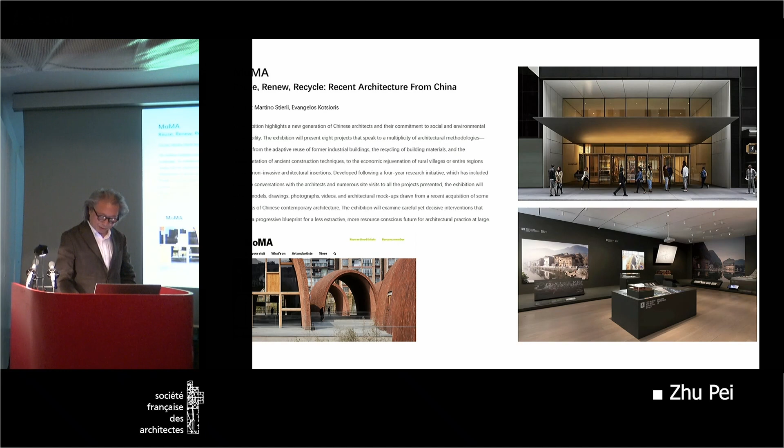This exhibition discovers a new generation of Chinese architects trying very hard to find a new way to approach contemporary architecture, with the cultural and material tradition of China. Their designs are not only contemporary, but also strongly and deeply rooted in the tradition of Chinese cultural background. But why is traditional Chinese cultural background so meaningful for Chinese contemporary architecture?

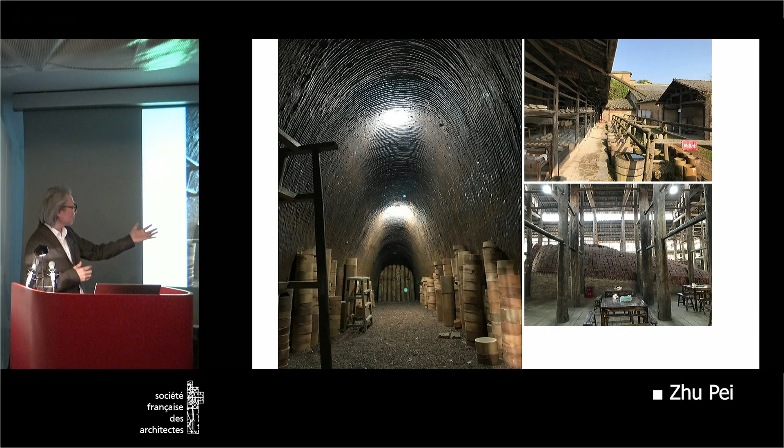Even the school—small kids from elementary school—came here to take the heat, the advantage of the warmth. Even the warm bricks, they put in the school bag. So this kiln place became their social meeting and communication space.

This became the soul of the city, and they still keep this tradition in some part.

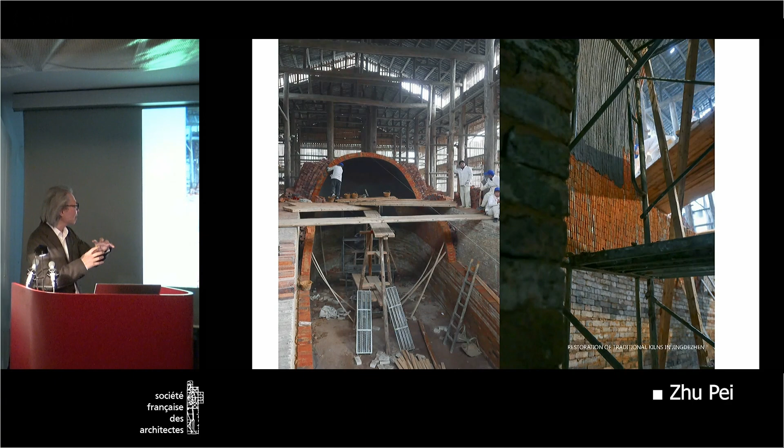When I worked on this design, I discovered how craftsmen rebuild this brick kiln through construction. The basement is never demolished, but above it they have to demolish once a year. They have to keep the thermal character going after burning many times—they lose the thermal character, so you can see the bottom right.

This is the video I took, actually now collected by MoMA. I selected part of how they built it. You can see they use their fingers to create such a complicated double-curving shell.

This vault is not like an arch. You can see their fingers, inch by inch, changing the shape. So they convert a complicated double-curving form into single curvature.

I think this is similar to today's work on complicated form architecture—we have to cut through, transforming complexity into simple curves. This is a lot of inspiration.

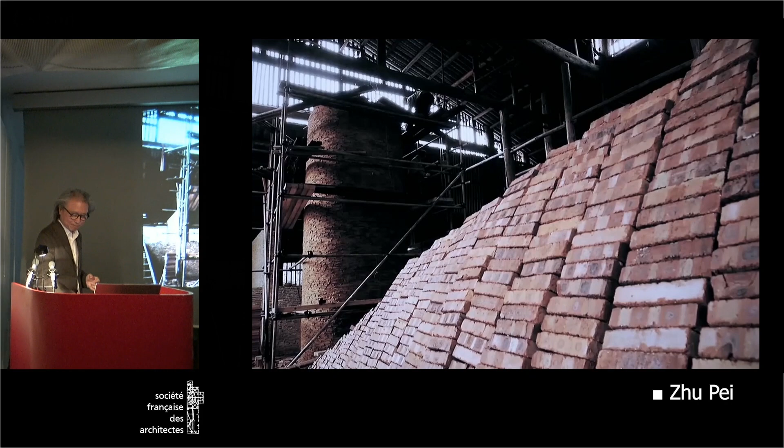Now, in local tradition, this is how it works. The brick kiln has to be demolished very frequently, and those glazed small bricks, piece by piece, get mixed with new brick.

They build their housing. The whole city is built on this tradition. This is our side, and beyond is the...

imperial kiln factory, from the Ming and Qing dynasty. This place used to be the fire station, then it relocated outside. We can see such complicated urban texture and fabric. You can see this Ming Qing dynasty housing, the social housing and so on. Beyond, you're going to see the big river.

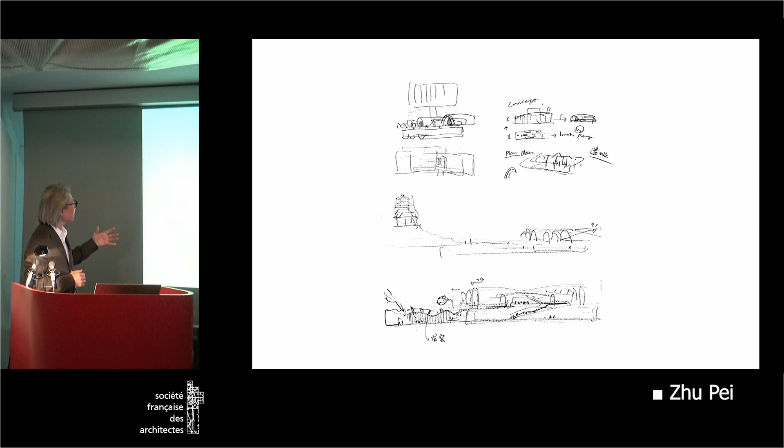So if I try to simplify my idea, one is that I try to transform their kiln, the brick kiln, into a contemporary space to work with this museum. Since this museum is going to be built to specifically house the porcelain produced from the imperial kiln, this is more like an archaeology museum. So I think about where the porcelain came from—maybe from the brick kiln, like this vault, never too big, never too small. This is the reason I want to transform it.

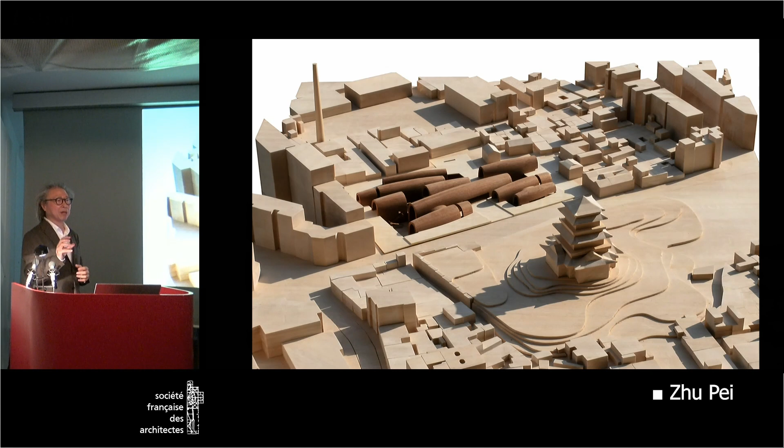I think you feel this is very old thinking, right? The root is very old, like historical continuity. But the architecture became contemporary. If you look at it, this is the conceptual one—you can see each is a different curvature, different size. It's so complicated in another way, but we discovered a simple construction approach to make this architecture more systematic.

This is our process—I don't allow my team to use 3D printing to make the model through the conceptual phase. I know the construction is by hand, right? But you cannot design this way through the digital. I feel this gap must happen. This is the reason I found out a lot of architecture falls apart or fails—because they use 3D printing for everything, but until construction, there's a disconnect.

So if you look at this, why is the form curvature so complicated? But you can see this horizontal cut—this is a handmade model. That shows the system. Even this very complicated form—we still use a very simple way, like the craftsman making the brick kiln. It's layer upon layer, millions of layers of brick. So I think this is the way.

And in general, the program—people go from the archaeology side through the bridge into the foyer. This is the major front, and then the permanent exhibition goes from inside, past the connection, and then to semi-outdoor, inside again, and then down to connect back here. This is the permanent exhibition.

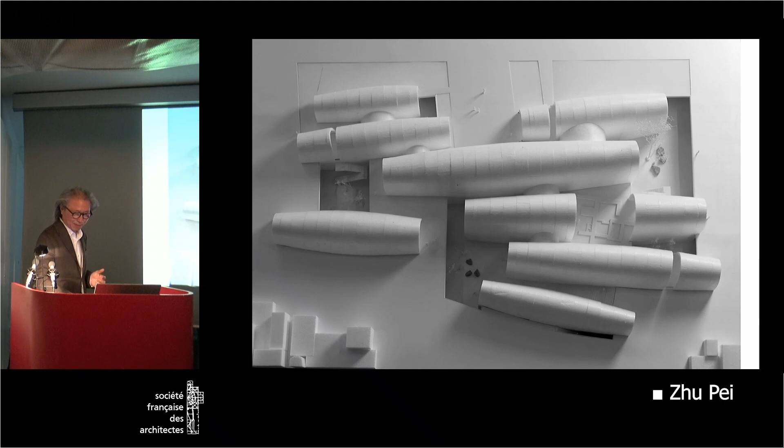So this is a very complicated program in a restricted urban site, but eventually everything worked out. After construction, we discovered the Ming Dynasty ruins, and then we readjusted the whole design to integrate this archaeology site into our design.

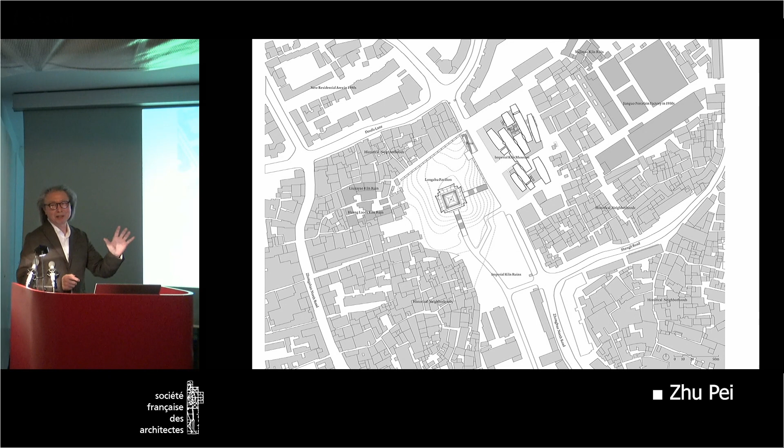We just keep doing this—even today we still use handmade models. For me, my studio's thinking always comes out either through sketches or paper models. It's not 3D, but we continue to use the computer, while at the same time also relying on the physical model.

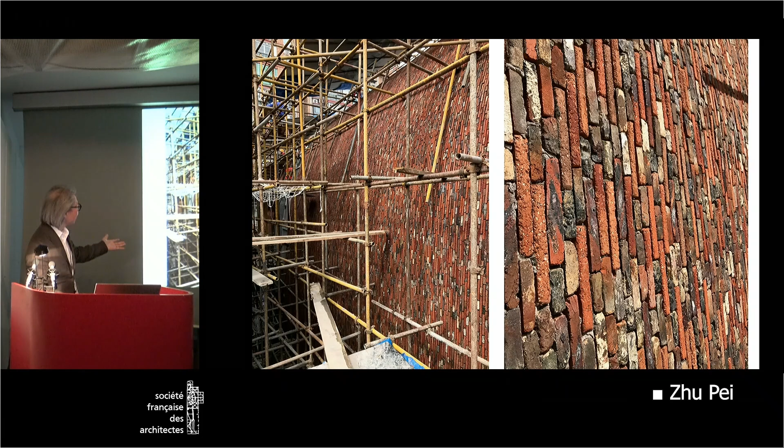You can see in general the site plan, the construction, and all the collected brick. You can see a lot of the brick is glazed, and we have a construction style—this shows how we transform or invent some interesting construction systems.

For example, this is the formwork—a wood form, so soft. This scaffolding is a changeable scaffolding, and underneath we have a track, so this can be moved, and the mold can be adjustable. The first layer is laid based on this mold, and then we put down the steel bar, pour the concrete, and finish with masonry for the brick.

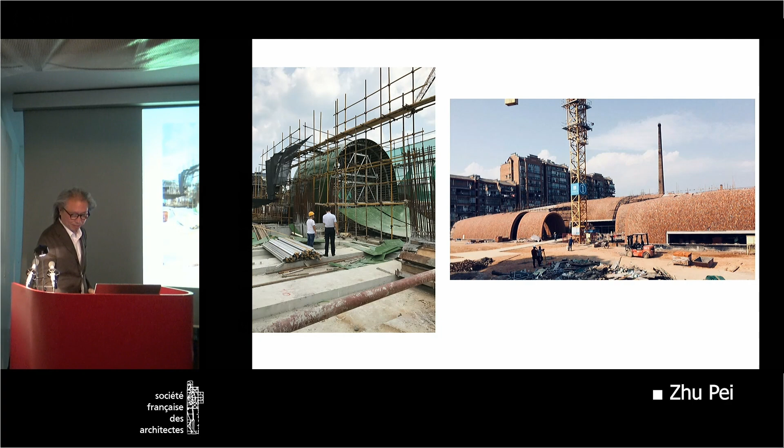Incomplete integrity, right? You can see this is zigzag. The building became fragment form rather than big chunk, the object or landmark. So I feel this building strongly represents my point. It's also talking about rootedness and how you invent new things.

So this is maybe, right, this is after build. You can see the whole building is somehow sunken, close to the earth. I feel architecture is earthwork and roof work. You can see this is surrounding the hill, and the whole building just peacefully, some water, small reflecting water, to organize how people approach, to get close to this architecture, also beyond the factory.

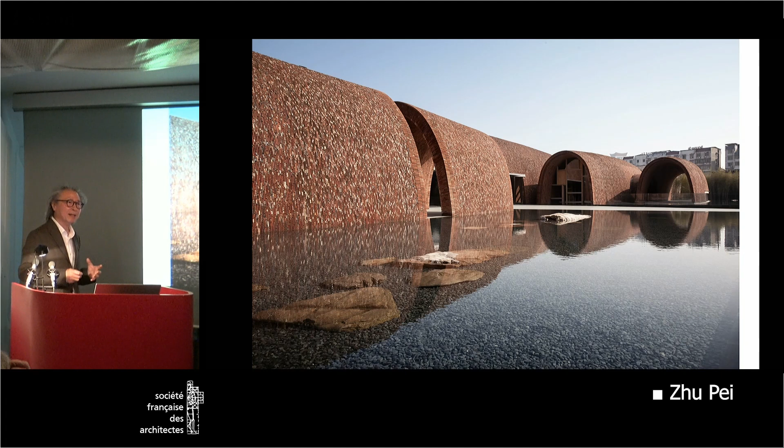And this building also showing the roughness. Sometimes you can see the roughness and peaceful water with stone, kind of a tension, poetic way. I think architecture has to create tension. One way is very old, another way maybe is a surprise or that thing.

So this also, once people close up, you see the mixed masonry wall. You can see the old brick, new brick. This is a lecture hall. You can see here, and this is a tea house.

This is the entrance. People pass this little bridge, reflecting the local culture. They like water, since they consider water is fortune, for example. This is like...

Along the public edge, not only do you have this water, but also it's semi-public. All the programs can be independent once the museum is enclosed, like this lecture hall. They have a separate entrance. This tea house, all have.

So this is also showing the tectonic or material proposition. You can see this wall structure, right? Once we cut this horizontal window, you have to use a big beam to support. So they start showing this idea.

This is a tea house part. We have a huge cantilever, the concrete beam to also. Once you walk in, you're going to feel the space going to somehow attach your body. If you make this museum too big, you'll never have this sense of feeling.

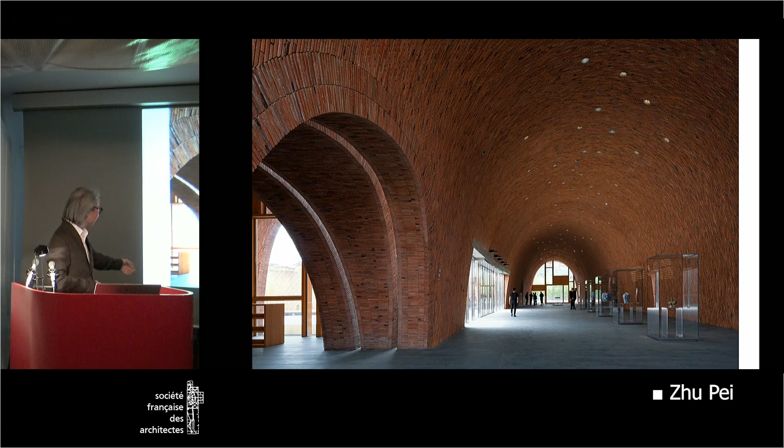You can think about it, even without this glass case, everybody would feel this must be porcelain space, right? But for this design, I made the whole thing. Not only architecture, but furniture here - you saw the glass case - all designed by our team. You can see very transparent, minimum glass case, making a contrast with the brick.

Right, this is once you go inside, you go to another space, which is from semi-outdoor, indoor, semi-outdoor, go to the indoor again. And also always changing in terms of the curvature, the scale of the gallery space.

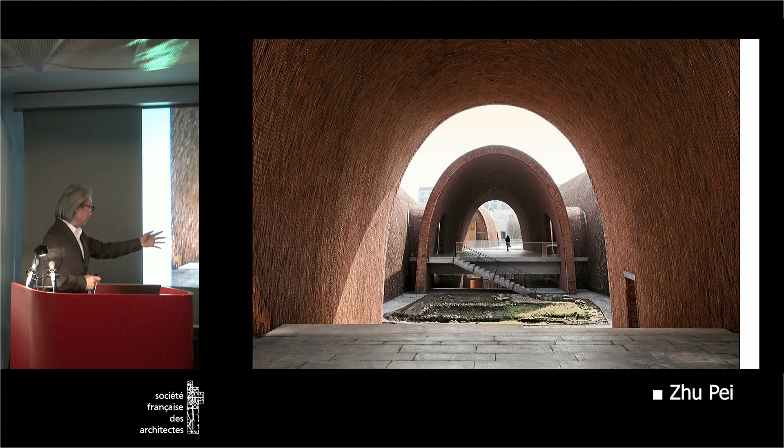This is like I mentioned, archaeology, the ruin site, and then we integrate. This way, it is the amphitheater.

You can imagine people sitting there to see through the building. Not only do you feel the natural wind touch your body, but at the same moment, you see the people in and out. You see the people go up and down to get close to the ruin. And then this is showing somehow people wandering inside the museum.

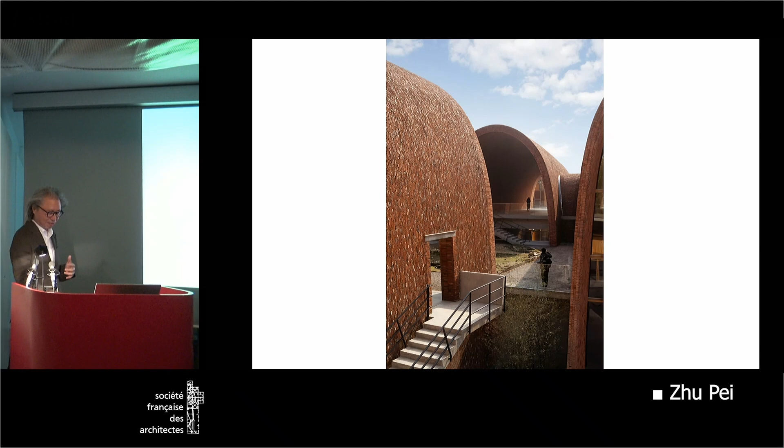It's more like music. I consider the architecture to be more like music. You have to have a certain order, just their foundation, and then you make something different. You can see this difference in height, difference in scale, different program, different light. All things are different, but they're based on the same brick wall.

People go down this stair. Once you go down, you're going to see the light. Just bring the people down in order to make this whole building as low as possible.

It's lowered as much as possible. And then courtyard, people also can see the working place, how people restore the porcelain and fakes, but you see the bamboo, you hear the raining sound, it's beautiful. You can smoke under the cantilever. So this is what I mentioned, the wall.

This door, if you go there, you're going to connect to the temporary circulation, but sometimes they separate, sometimes they connect together. And then this is how we can make arrangement about the glass case.

People criticized this. I called the expert and they criticized me, saying we never saw a museum like that, that it's going to be no good for the exhibition. But I told them, most museums place the glass case against the wall, but then we can only see maybe one side. Porcelain needs 360 degrees of visibility - they shouldn't only see one side, they need to turn it around, they need to see the bottom.

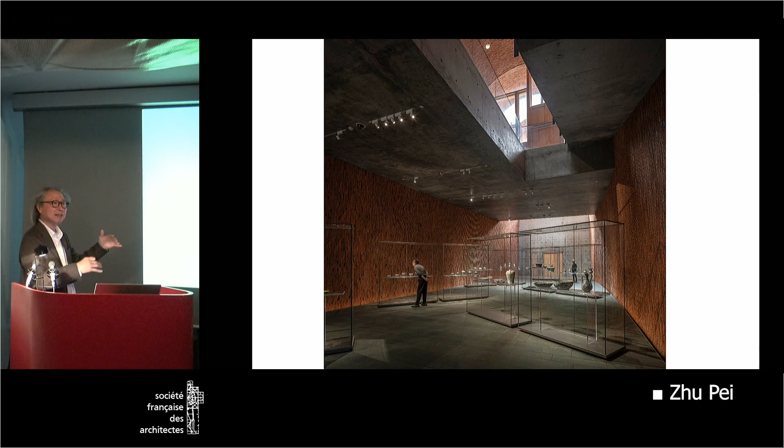They can tell where the porcelain comes from and when. So I feel this kind of fishbone structure organizes people's circulation. I feel this lower part of the space is more like a fish belly - the fishbone works with the fish belly. Once again, the whole thing has to work together, they have to have that relationship.

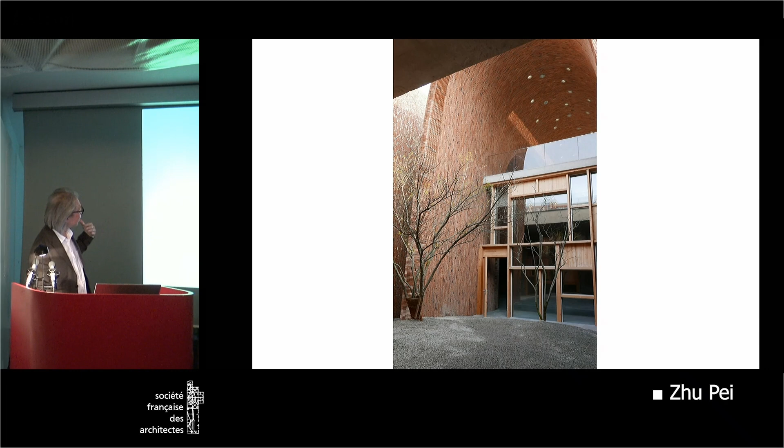This is a courtyard - you see the tea house, people sitting there, you see the landscape. Actually we're standing under the roof. Behind is a multifunction hall. This is the one courtyard, and then this is the point.

When we finish the permanent exhibition, you end up at one stair. The whole museum never shows the stair as a whole thing, just shows one piece. People are going to wonder what is beyond, and then they're going to try to discover it. I feel architecture has to make people interested, to attract them from one place into another. I think wandering, or moving, is important for architecture.

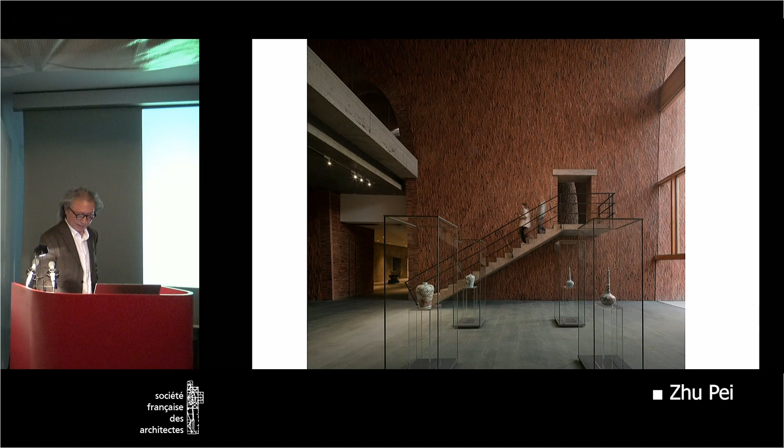And then you see the little door, right? And then you discover, oh, another stair - people find their way down from here and turn the other way. So it's half hidden between two brick walls. Look at this brick - people always want to touch things. This masonry wall uses very old brick, and it's really hard to tell - people wonder when this brick is from, maybe Ming or Qing Dynasty, even earlier.

This takes you back to the foyer again, until you see the front little lobby space for the lecture hall. Once you open the door, you see the whole brick wall. This is more like their working condition, topped with an observation hall. When they were firing the kiln, they had to rely on a little window through the wood to see the color of the fire in order to tell how much degree it was.

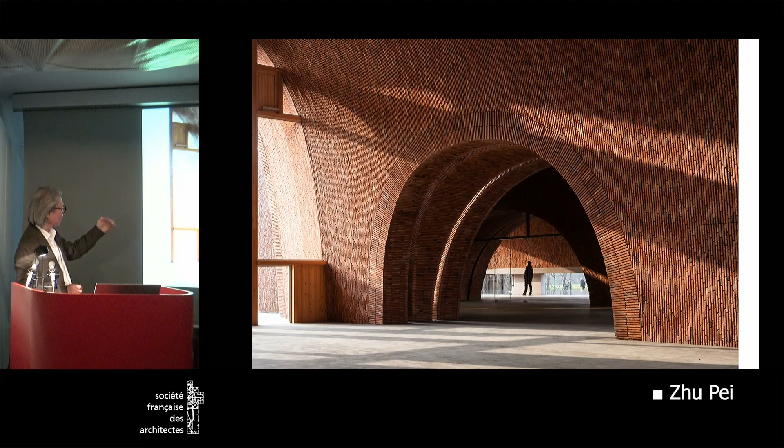Also this lecture hall is not a black box - we also have a horizontal cut, like a water level, the surface level half down below half. So once you feel bored, if the lecture is boring, sitting here you can see through, vertically and horizontally, to enjoy the nature. So you feel the space goes from one into another, connecting each other.

Once you walk to the tea house, your view is blocked by this brick wall. You have to sit down. Once you sit down, you see through this horizontal cut, beyond to the archaeology side. I think the archaeology side is always talking about what's underneath, right? Once you sit down and drink the tea, thinking about the earth underneath, I feel that's going to bring everything together in nature - environment, program, people's activity, light - everything.

They're working together. This is also showing a lot of operation windows - they can bring light in. Some open, so the natural light can quickly and naturally concentrate.

I'll take a few minutes break - enjoy. Sometimes architecture, I feel, is hard even when I show the slides. Maybe now, I don't know, maybe video is better, a lot of the time.

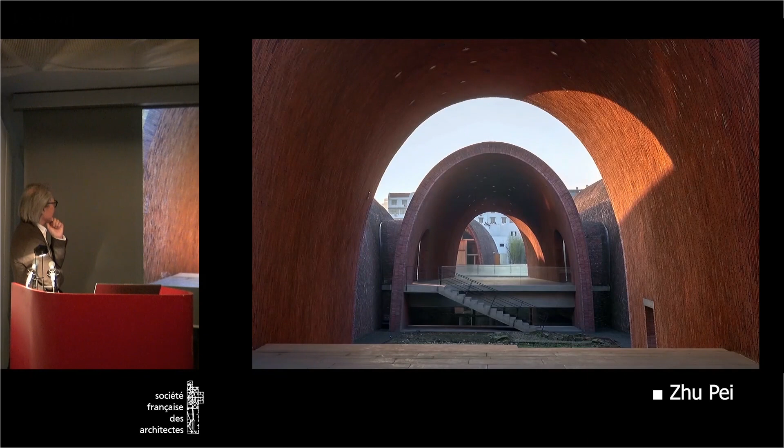Architecture is not only an art piece, but your work has to really make people enjoy it. So after this museum was built, wow, a lot of people came. This whole city used to be dead.

So I think sometimes architecture has the power to really make people enjoy it. I think this is the porcelain museum. I'm going to quickly talk about another one currently under construction: the Majiayao Ruin Museum and Observatory in Gansu province.

Jingdezhen is kind of tropical, but this is a very cold, Loess Plateau area in the northwest part of China. This is the ruin site, discovered by the Swedish archaeologist Johan Andersson in 1924.

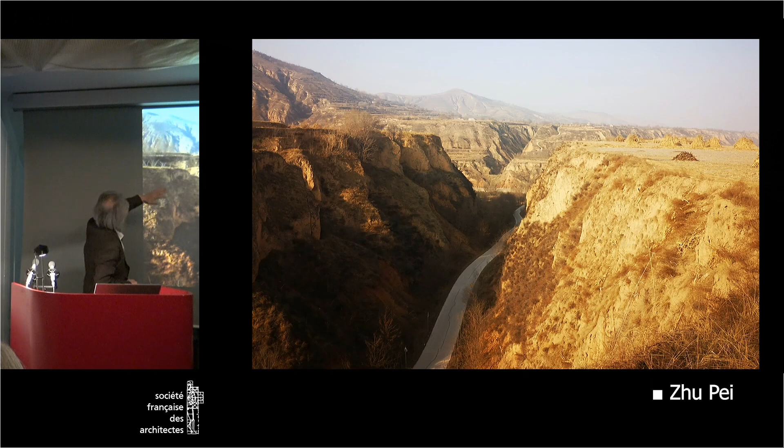This is local - the mountain is beyond, but it's more like a flat Loess Plateau, with yellow clay. A lot of the early houses were like caves - people carved things out because the clay is so easy to work with, soft, not like Jingdezhen which is rock and water. Here there's less water, but beyond there's a big river.

This is my earlier sketch, the correspondent for two projects we're going to do. This is cutting the section - this is a canyon beyond the mountain, and this is what we call the plateau, the horizontal.

This is the observatory, and then this museum, this ruin. You can see the observatory, museum, ruin, and then one canyon bringing the water, going beyond.

They have a big river called the Tao River. You can see locally there's white land, and the plateau river runs just perpendicular, going this way. It's quite interesting - when Johan stood on this plateau front side, this is how they realized people chose the location for the settlement.

I think it's quite intelligent - this is facing south, against the plateau. But they're not too low because of flooding, and not too high, far away from the water.

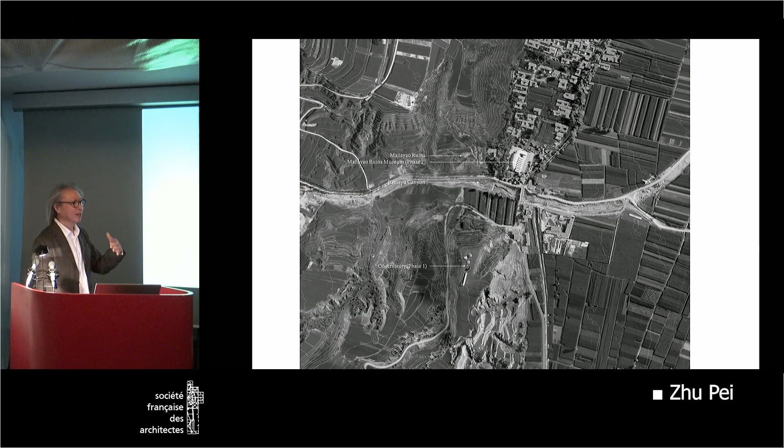I think this is what I'm talking about - siting posture is so important for sustainable thinking in architecture. Not just building everything, everywhere in the same posture.

So this is our drawing, cutting through. This is our model - the museum, and the observatory on top. For the observatory, I did a very simple, permanent horizontal cut, hiding inside this plateau.

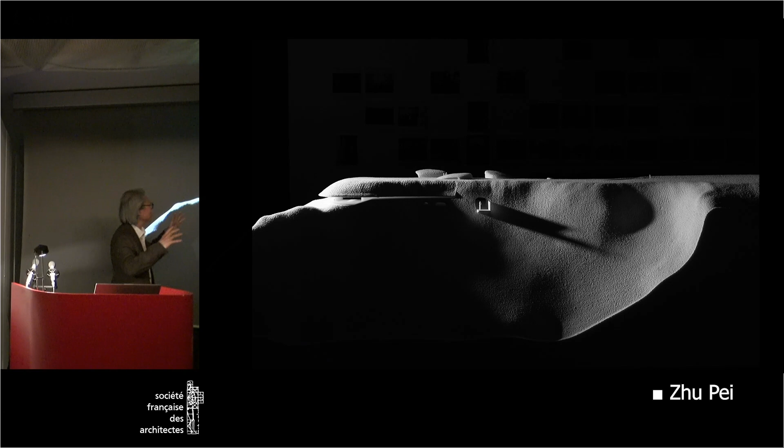Just one cut, and maybe a little hut to represent this civilization, but most of the things are hidden in this plot. Construction is even more challenging and quite critical.

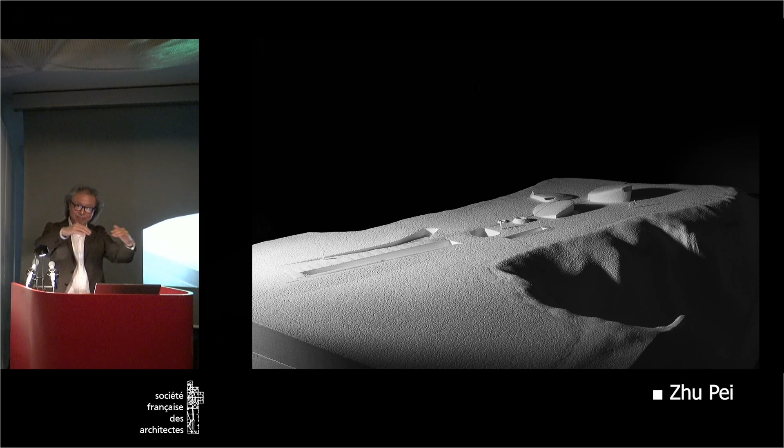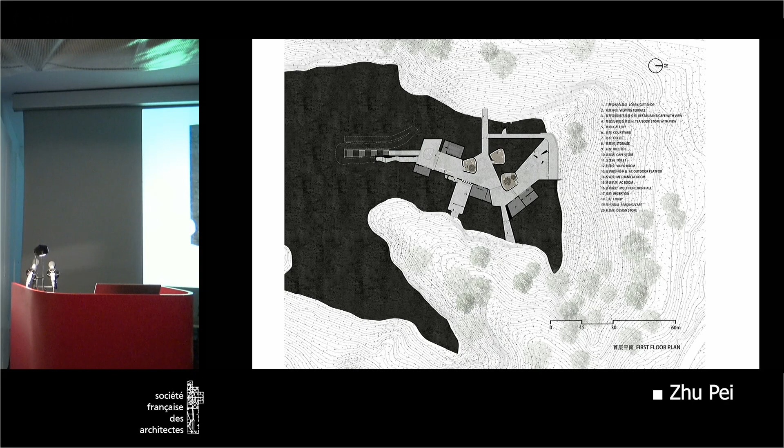In order to protect this weak soil boundary, we designed the construction to only dig a hole in the center and then carve out a tunnel to the boundary in order to keep the landscape. You can see people come here and view three sides - the landscape beyond, the water, and the ruin site.

So this is a very challenging construction approach. You can see the scale of the model - we rely on the model. So we keep doing big things.

But this is a museum. I'm thinking about a cave and a nest. You can see this is the big cave, a big shell, blocking the northwest wind locally.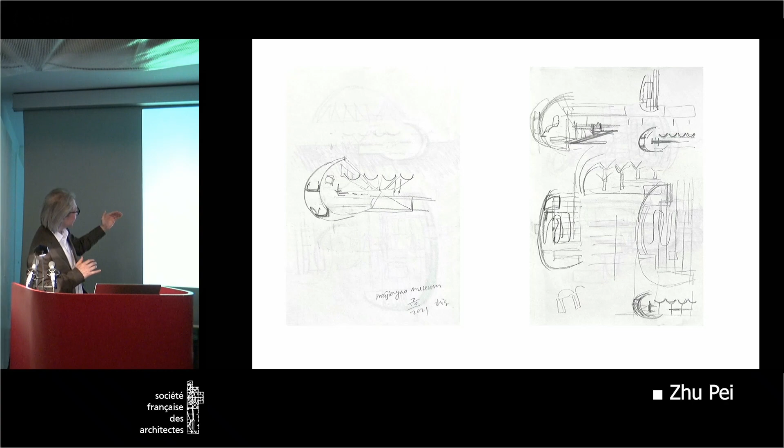There's so much wind, but it's like a piece of pottery. You can see this is our model - it's more like a translucent slide you can go inside. It's like a cave, like a huge piece of pottery.

If I compare porcelain and pottery - pottery must come through nature, not artificial. Porcelain has to be artificial, you have to make heat at 1,300 degrees. But pottery, I'm thinking about the yellow clay after a thunderstorm, maybe fire, and the second day people feel the soil has become hard, frozen. I believe this is where pottery comes from.

So when I think about this way, I have to really make this building somehow sunken into the earth. Actually, the earth is this high.

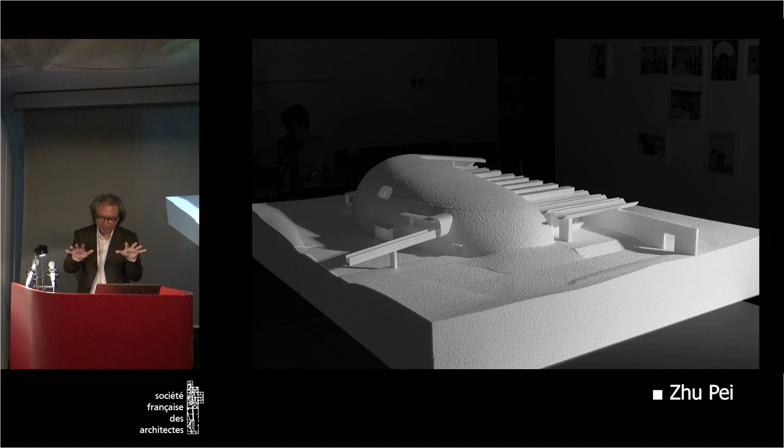And then beyond, this bridge is going to bring people into the ruin. But this whole building just pushes into the earth.

So you can see the poster, the structure and the form. You can see the cave and the nest. You also feel many things work with the people.

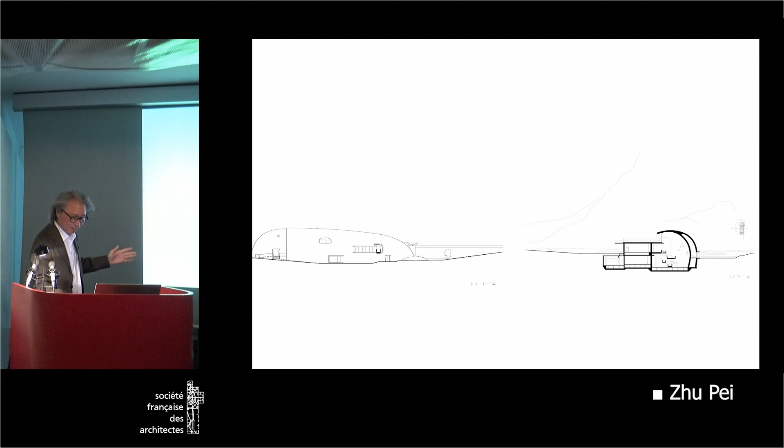And the whole building just relies on the one ramp. The ramp walks through, from this way, from here, goes all the way concentrated. You can see this go inside. No stairs, definitely we do have some for emergency elevator, for the handicap, but in general the public just walks on the ramp.

And you also feel the ceiling is not like most museums, very tall. Actually, pottery is even smaller than porcelain. So you don't need the standard idea that if we're talking about a museum, it must have a very tall ceiling. No, actually this is not that.

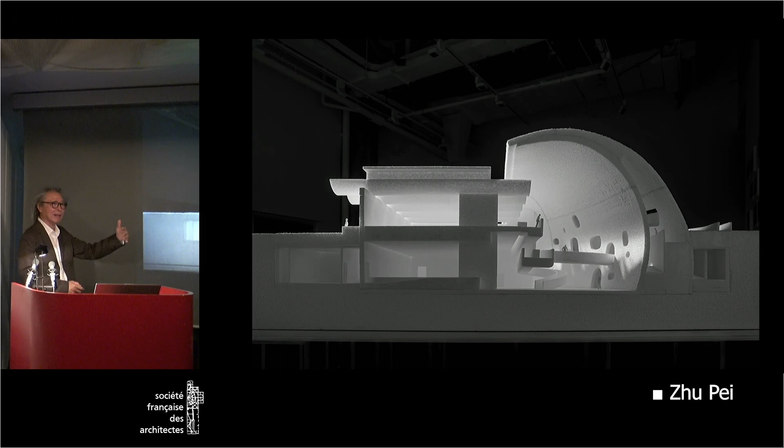And this section shows the idea for this design. The cave, also this cave, is double shell to create a kind of space. This is local - if you go to the northwest part of China, you see a lot of places like Dunhuang, right? You see a lot of caves under here. So people are going to concentrate, and you can see the whole thing brings people to the ruin side.

So for construction, you can see we never used digital methods, right? Even for this big scale architecture. I never heard of it before, and at this moment - but if you think about it, if we have very strong technology and use technology to build architecture, there would be no mistakes.

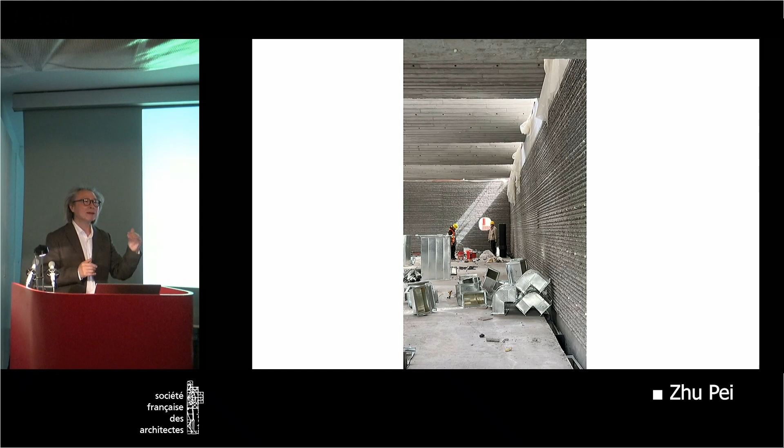Why is pottery so important, right? Because they're not made by machine. They have mistakes. They're pieces of art. They have surprises. But if we're making all architecture through technology, I feel this is no longer art anymore. I feel in the future, human beings' creativity and imagination will become so important for architecture. So this is the construction side.

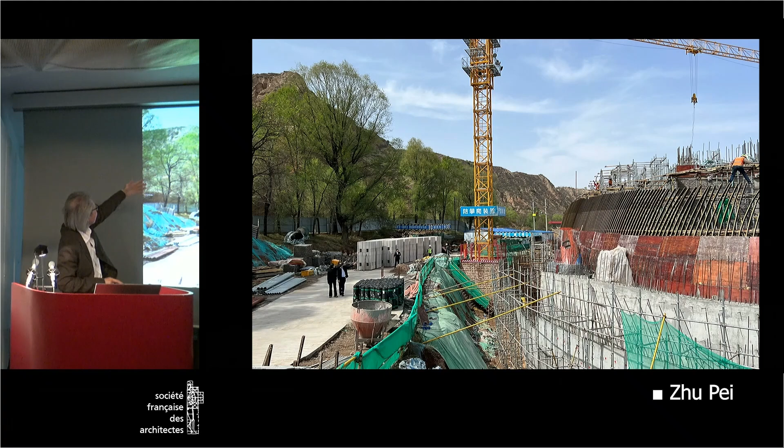We have - you can see this is not natural light. The shell goes beyond the other way. You can see the texture, roughness, and then the landscape - how we protect this landscape. You can see this is beyond the plateau.

This has many local materials, concrete things that are local. They have the Taohe river, which produces interesting sands and pebbles. We try to integrate them together. I think this is packaging again, another topographical setting. This is not a single architecture.

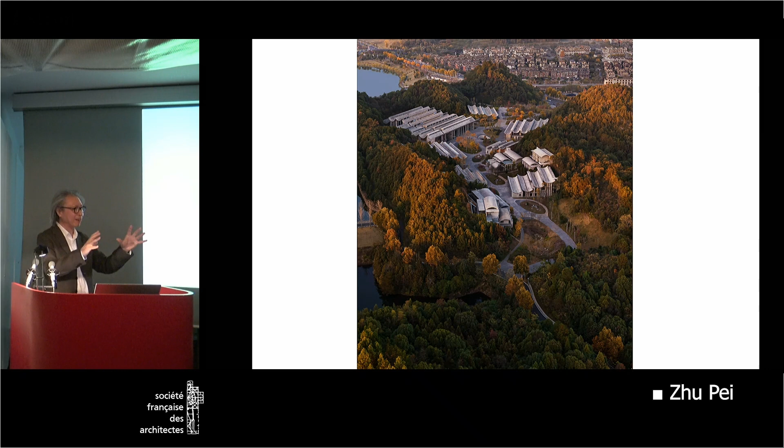This is called the conference, international conference center. But in the beginning, I convinced the leadership to convert a big chunk conference into fragments, like a settlement, like a local village. If you go to Jiangxi, you're going to see a lot of villages along the valley, and how we can work with that.

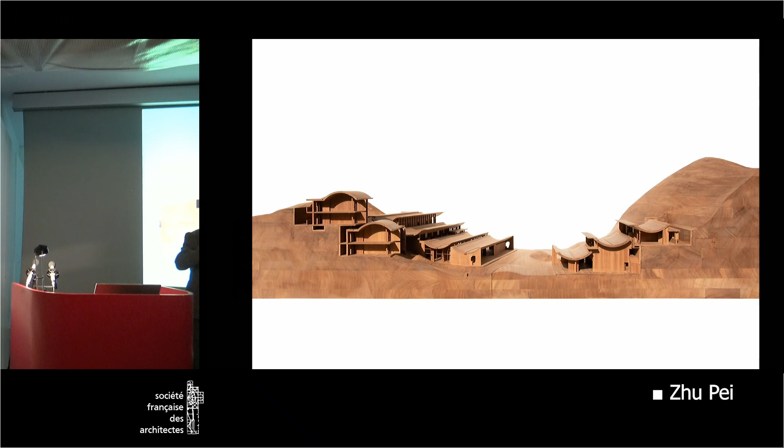But another idea is the structure and the form. You can see this whole building base is just one structure. The two shear walls support the roof above. And though it's complicated on the side, we just build one higher along the side. You have the flexibility. But if you think about making a huge big scale building, you have to demolish the site.

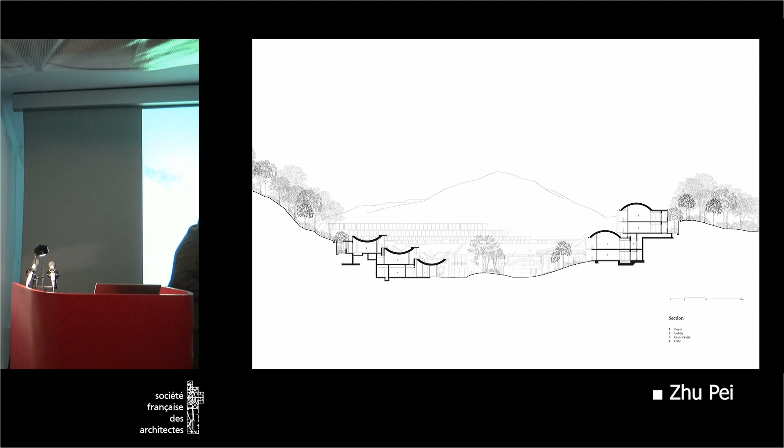And so this is the idea of how we work with this angle, just one structure. That's very simple, but they create a very complex experience. You can see this is almost just one structure repeated, but they create a very diversified angle this way, also arching that way.

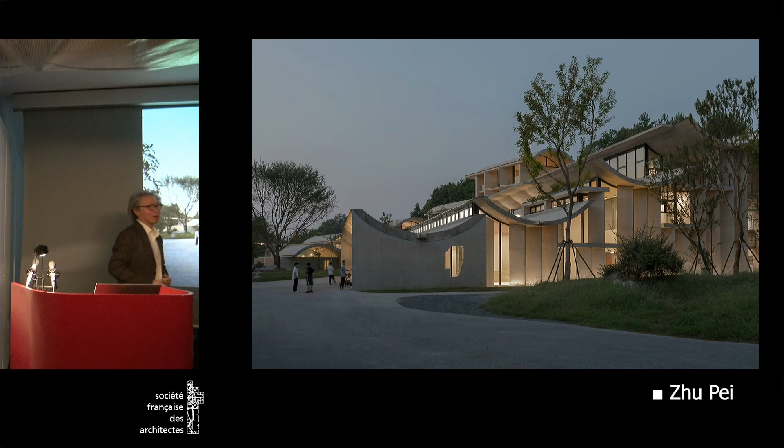This is the wall support, this is a shear wall, but this is for the shading, how it works with sun and shadow and so on. You can see this is beyond the small hotel, and then this is the small conference in front. This is a middle-sized conference.

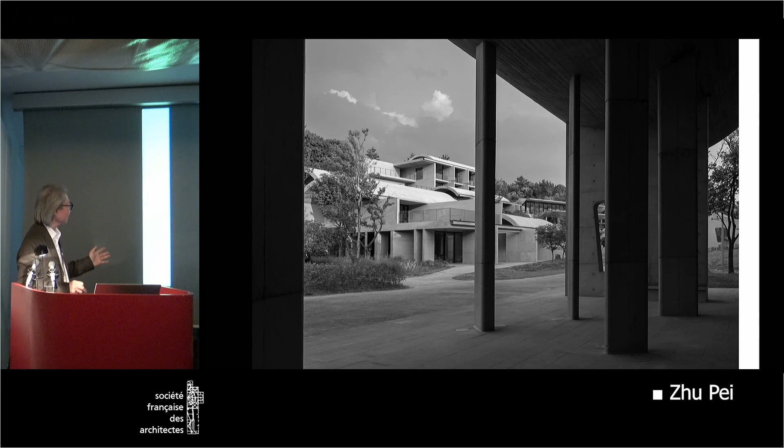Things locally are humid, right? As people, with a lot of rain, people have to stay under the roof. I think this space became the key for the local building. We have to really deal with this climate to let people feel comfortable. You're not just black and white, interior and exterior. You have so many things - you're under the shadow, protected from the rain.

So you can see this structure, right? Even the big structure is just very simple, rough - the way to create a lot of overhang. The meeting can be outside, not only inside. This is always a foyer, where people are climbing up and going into the room.

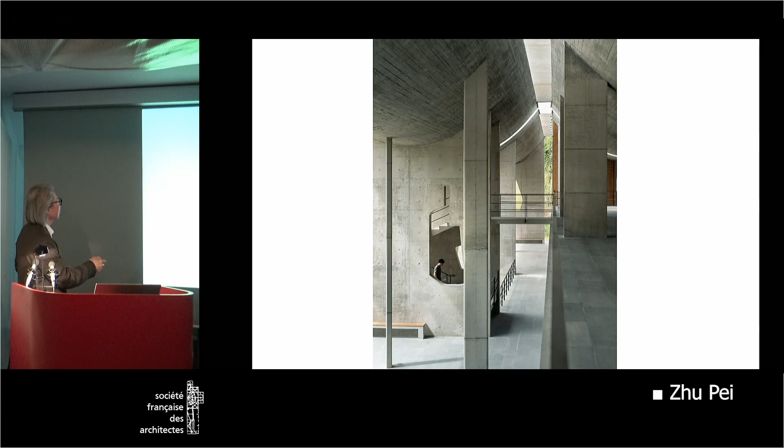Even this top we have to protect from the roof, so light can concentrate but rain never gets in. This is a foyer, this is the biggest conference room. We can see natural light, not a black box. But we definitely have a sliding shutter to control the folding panel to enclose it. This is like a mid-size space.

You can see it's so close to the edge of the mountain, so we carefully made the right size and right construction way to have less impact. You can see it's so close to nature, you can walk out. Through the tectonic way, you can see just the shear wall, the roof, and the concrete slab. This is showing somehow like a settlement.

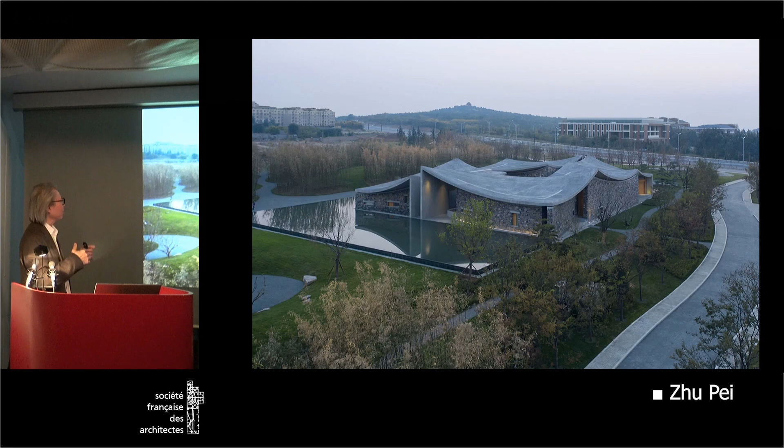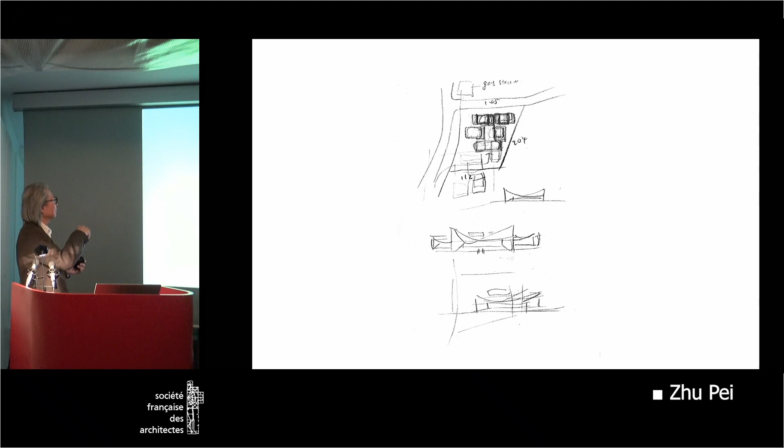Once again, in the north part of China, this is a test of how concrete, the roof, reinforced concrete - how they can be not only like the arch, but also like a tent. Locally they have their wood roof, but all the wall housing is made by this stone. And this very simple idea is just like a pinwheel organization, like a central courtyard surrounded with some rooms.

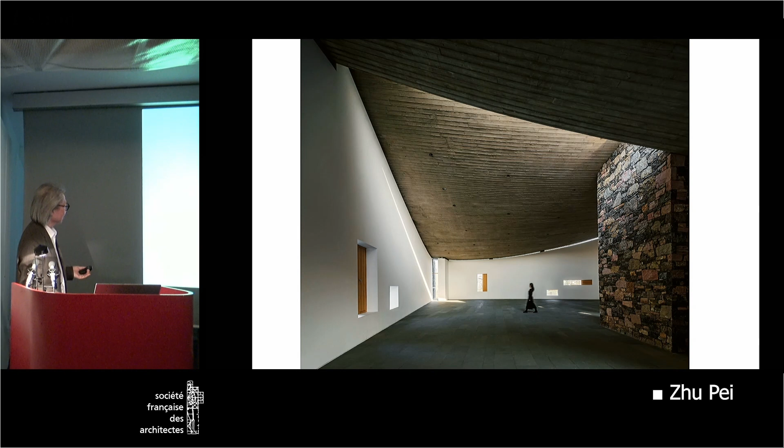This is an art center. You can see this concrete roof - it's showing the tension, right? How reinforced concrete can also have tension. It surrounds the courtyard, you can see this is inside - the rough stone wall, also clean white wall, the skylight, the concrete tent roof. Beyond is the central courtyard.

This is more multifunction. You can feel the structure, material, sunken courtyards working with light, and always have overhang where people can walk around. You can see this is a roof, this is a wall, the window is the door, the door is the window. People sitting here, and even at that little door people can hang on here, have coffee and so on. You can see this beyond roof how they work with it.

Another one is our project in Yunnan province. This is like the southwest part of China surrounded with huge mountains. This mountain is like 4,000 meters tall, and locally their lake is called the ocean. This is a minority people.

I was invited to design a performance art center for a Chinese performance dancer. She is great - she spent her whole life trying to rediscover the local dancing, and she used her whole money to try to build something to revive the local culture.

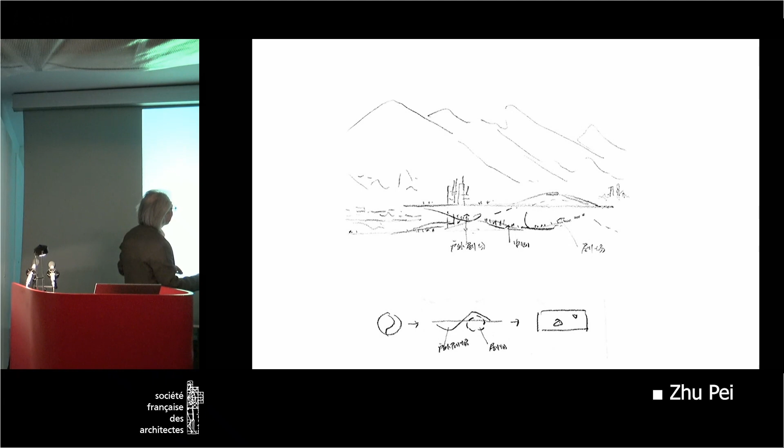The whole program was supposed to just be a black box. Then I proposed maybe one amphitheater, and this is yin, this is yang - above is yang, underneath is yin. All the rehearsal program somehow pushes into the earth, so keeping this horizontal balances the natural setting surrounding it.

Since locally the buildings are never built straight, they have a very rough, relaxed way. But I felt only one horizon line could control this building. So you can see the vertical way, horizontal way, under the earth, above the roof - everything plays with shadow, sun, and the yin yang.

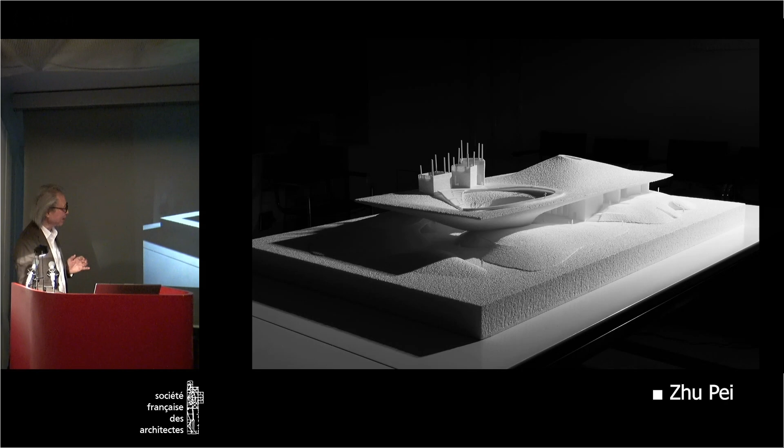So you can see this is the final design. I remember I also worked with dUCKS scéno, a French theater consultant - we worked out how to play this. Her play, I encouraged her, it's not only staying inside, but also starting from outside the roof, going in and then going out. So it's not a formal performance.

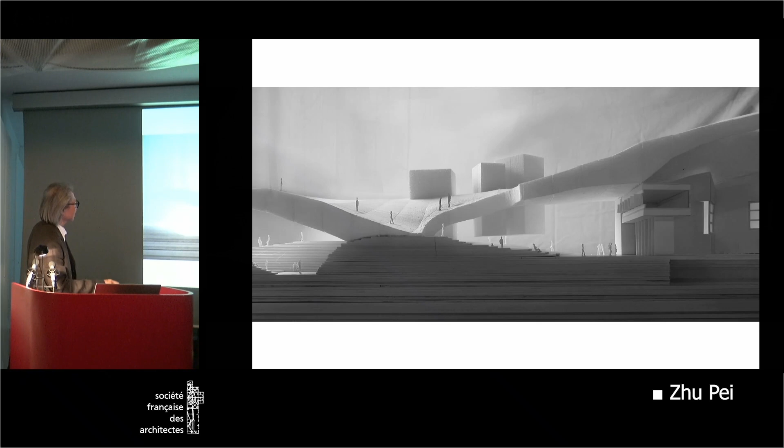And you can see this is underneath the roof. This is showing - definitely we have a program underneath. This is an amphitheater, this is the theater, and then the sliding door can open so they can join the big performance. So you can see rehearsal, small lobby.

People can see the artist play here, right? This is - you can see the mountain, right? The old town is somewhere here. This is the huge mountain surrounding this peaceful area. Local people always sing in the farmer fields, dance, whatever on the boat.

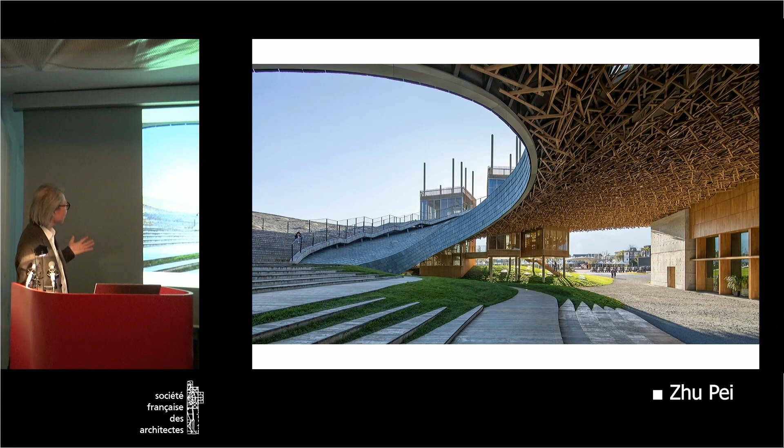They have quite an organic way - the whole building is played relaxed. We even bring the bird inside. You can see this is also the tea house and cafe above. People surround and walk around the roof to see beyond the mountain and the water.

This one, right? Maybe this is the last one. And I think last time Solomon, you also mentioned this project to me, right?

So today I represent, this is a cultural center where we were invited to design in Anhui province. Anhui has their very special, the housing is a vertical courtyard house.

This is an old town, almost 1,500 years old. You can see the moat, and this is the town. It's very old. People in and out through the field bridge, and this is back to Han Dynasty.

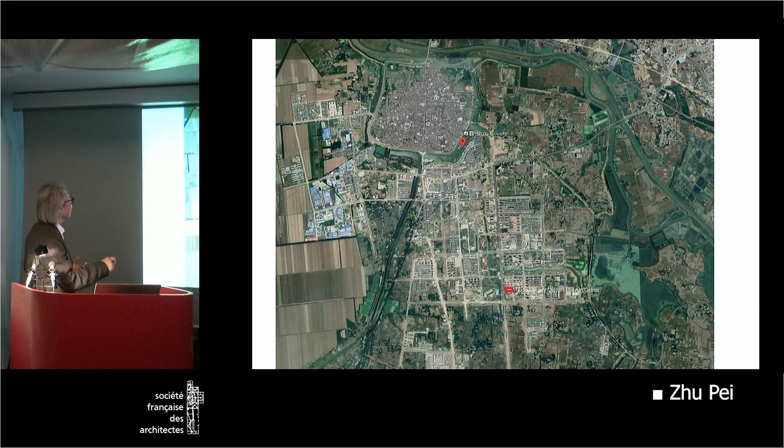This is a newly developed area, surrounded by very generic housing, government buildings, very boring, no character, so we have to build something here. This enclosed area, and then maybe the idea. We have to create somehow, you can see this is so boring, right? Government building, and then this house, social housing.

You hear a lot of the air conditioning noise. When I was on this side, I felt so boring and really hard to breathe. So I'm thinking about making this much more inward.

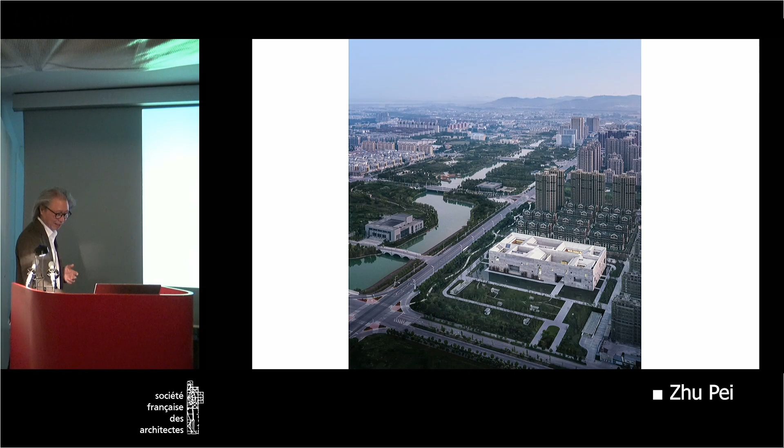The inspiration comes from here, from their old town, enclosed wall, local housing, even Anhui province, kind of Hui housing. This is their central courtyard. Their opening is very small, but they have a big roof. The roof on four sides slopes downward into the courtyard. Water is also collected through this special roof. Solid wall, very enclosed, solid facade, interior courtyard vertically, small alley to bring people into different rooms.

And this is my early sketch, and this is our final idea. You can see basically a courtyard to work with each program. At the same moment, I created the public loop to run through and connect all the programs.

But without interrupting the program inside. The programs we have are like library, museum, also cultural center, archive building — we have 5 programs.

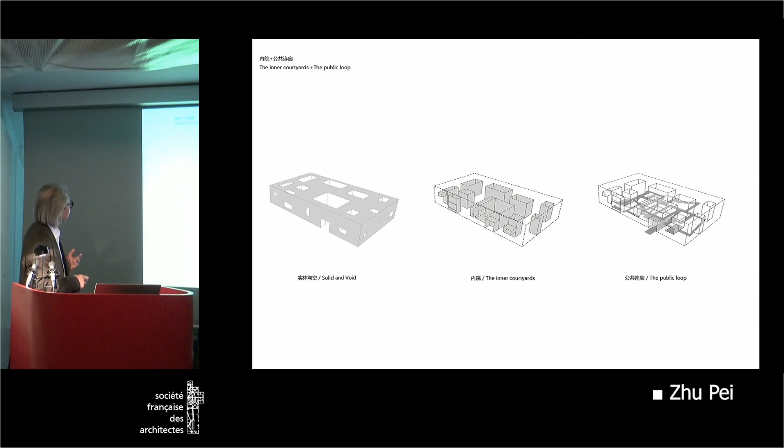5 programs distributed, working with a few courtyards. So you can see this is more like a void. And this courtyard, this is how we develop, compose the idea. You can see this is the 4 sides. The inward reflects the local, solid, small window, local, bringing in the public small loop.

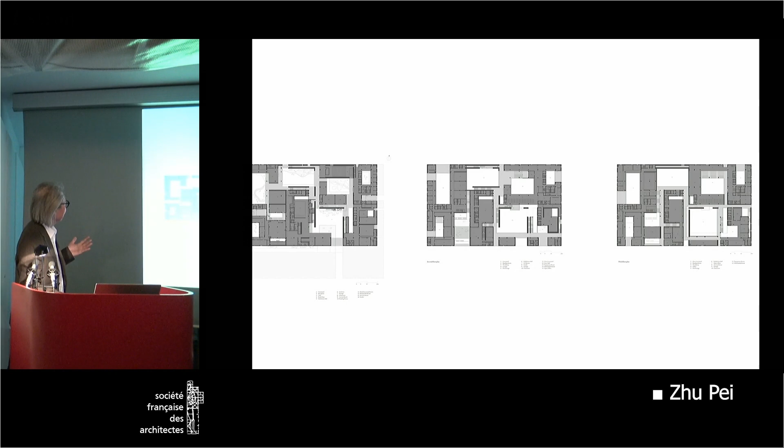Also quite local, but in a very contemporary way to recompose, regenerate together. And then people are going to feel very public. It's not just going to the library, and you can see this is a very complicated way, but you can see the interior program, how a courtyard works.

And then we also have this semi-public corridor, and this is how people walk into this building through here, right? More like their old town. And once you go in, you're going to feel this way.

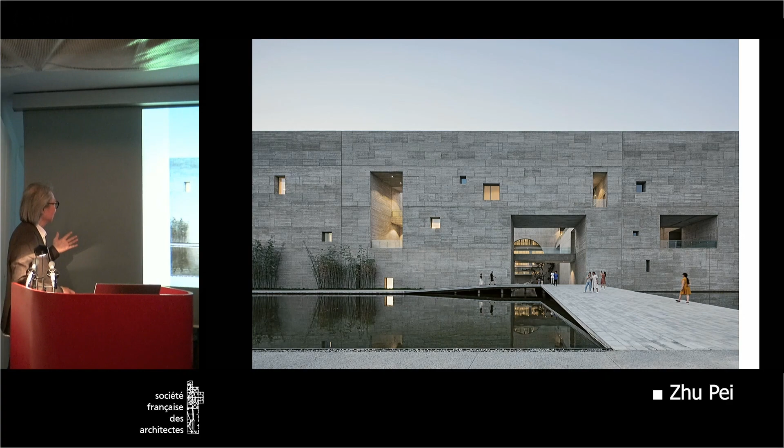Feel, okay, old Shou County, the old town, small window open to dialogue with the surrounding. The central, close to the central courtyard, more like how local people use their central courtyard, more like a living room. I think this is what we call the gathering public place for the people.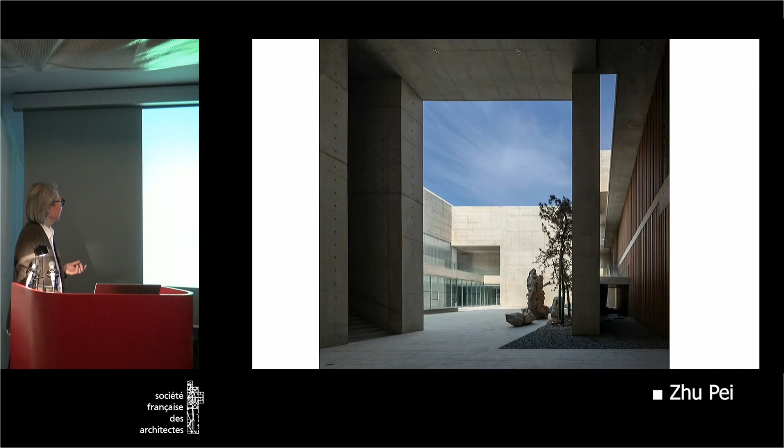You can see even beyond this, we have stairs, we have other programs. So once people come in, they're climbing up, going all the way through, almost everywhere without interrupting the program inside. Even if you have nothing to do, you can hang out here, also protected from the roof, or shaded, kind of a very linear way.

This is people climbing up to level 2, but you have the roof overhang. And this is beyond, once you get in, you see the pantry and also how people cross. This is in the middle of a level — not an exact level, somehow in between. You can see people come out from here and then go there.

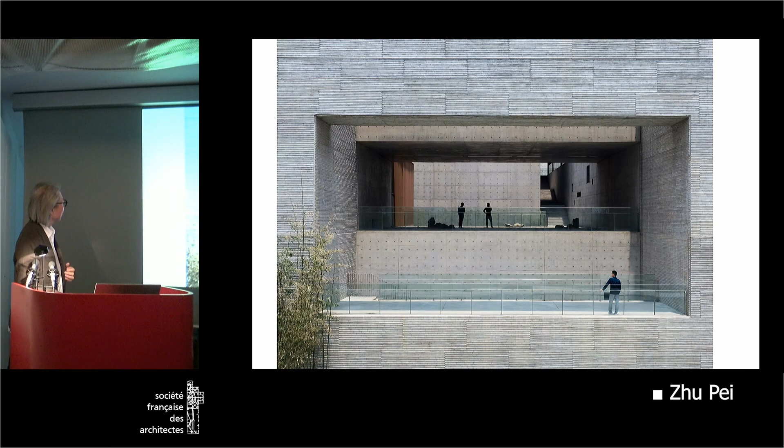So in general, the public loop — you can see they come at different levels, but they wander inside the big building with the courtyard house. We have a grand hall, a front living room, and also a back garden. This is also their culture — they always have a small backyard for more privacy.

This is the 3rd level. You can see this kind of very rough concrete work with different levels. People can stand under this terrace to see beyond. You can see so many levels and a very rich experience for people inside.

You know, this is the big, the very old courtyard house, right? But the idea is how I can create a new, very critical way to make abstract geometry to replace the existing building. We demolished this piece, and the rest are going to be frozen.

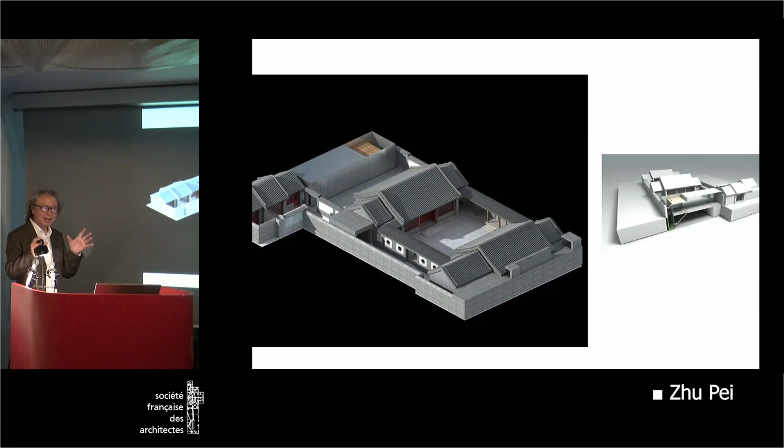But we still make a connection. The transition, this is like a root. We ignored this pitch roof - Beijing, called hutong, like Chinese architecture based on the cubic. If you think about it this way, like Forbidden City, courtyard house, like Huizhou - everything simple. I think they must have some reason behind it. So we try to discover this root, and you can see this is existing, but things not safe.

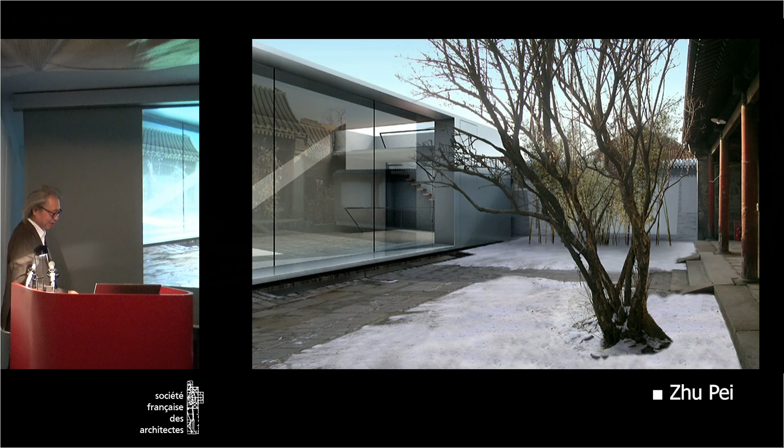We demolish, but we keep the same profile to dialogue, catch up the old housing landscape. But this wall can slide. This is for the artist's studio. Most of the time they like this, they enjoy the old one, but sometimes they also enclose the roof. Little small piece of terrace - you can see beyond Forbidden City.

And the first room I consider more like a Chinese painting, black and white ink painting. You can see this is almost two-dimensional, right? It's colored, it's very clean, keeping the existing condition.

Another room is more three-dimensional, exposing the structure. You can see this structure, very rough construction. We have to really cut it to reinstall. This is how we make construction, but we also create, you know, shutters.

This is their boundary wall, showing the concrete, how we're working with the brick and so on. This is frozen, right? Not trying to repaint or refinish - everything stays to catch up the...

Once I walk in, what's my memory or impression about this courtyard? Definitely I grew up in a Beijing courtyard. I know how they work, how people live, why this size, everything plays with the nature - sun, winter, wind - how this courtyard house is organized. So I feel when I work on this, I deeply understood the philosophy of the house. So when this house was built, I feel it's perfect, not much, not less.

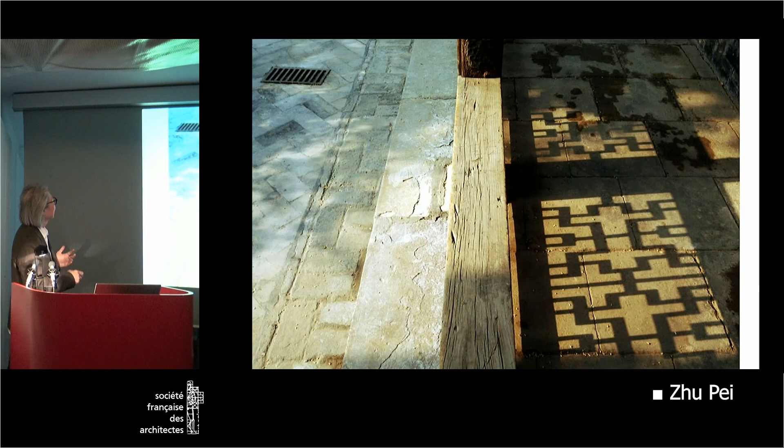Even like this shadow beautifully, and how they're making the brick - everything, even this. The artist tried to get rid of this to make a new door. I said, you're going to lose the volume of the house. So I insisted, okay, trust me, let them stay. You can see this is when I first walked into it like that. So everything installed - this is like a new house.

And then along the time, they're changing, right? The people work with this house. And this is most of my memory. So I think I used a little bit more time, but I just tried to clarify - I'm not trying to show how much work I did on it. No, but I just feel under...

The challenge I mentioned - globalization makes everything fly. The digital technology gave us a lot of pressure. Even our school - not only our school, almost all schools are facing the struggle of what is the future for architecture. And I remember just last month I gave a speech in Venice talking about this - actually, architecture is art. We have to understand we have the power, the hope, to know how we work with digital.